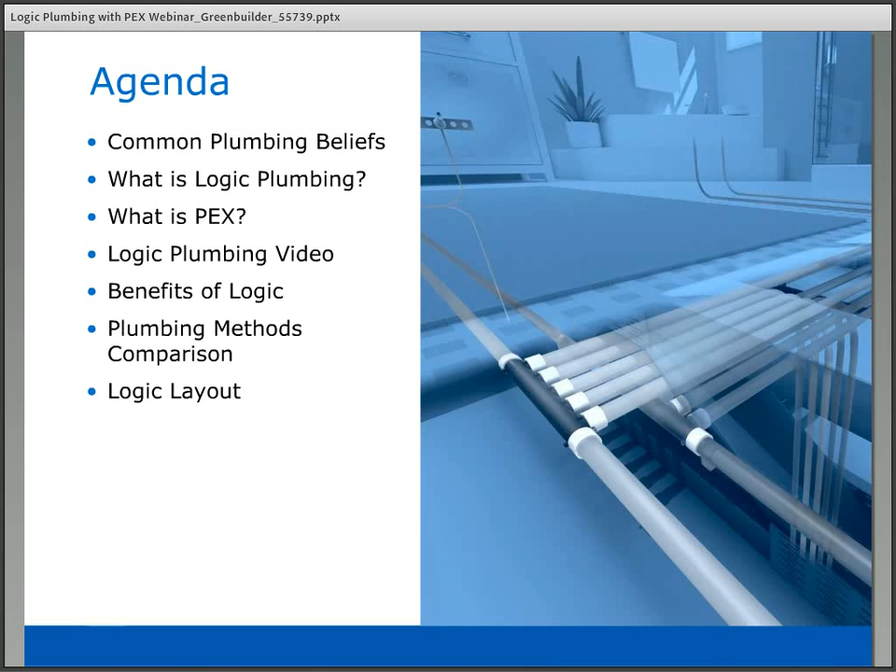Okay, common plumbing beliefs. I apologize.

All plumbing systems are essentially the same, and as long as we can keep all the water inside, that's what everybody's concerned about. The homeowner certainly doesn't care. They just want the fluid to come out of the fixture, and that's it.

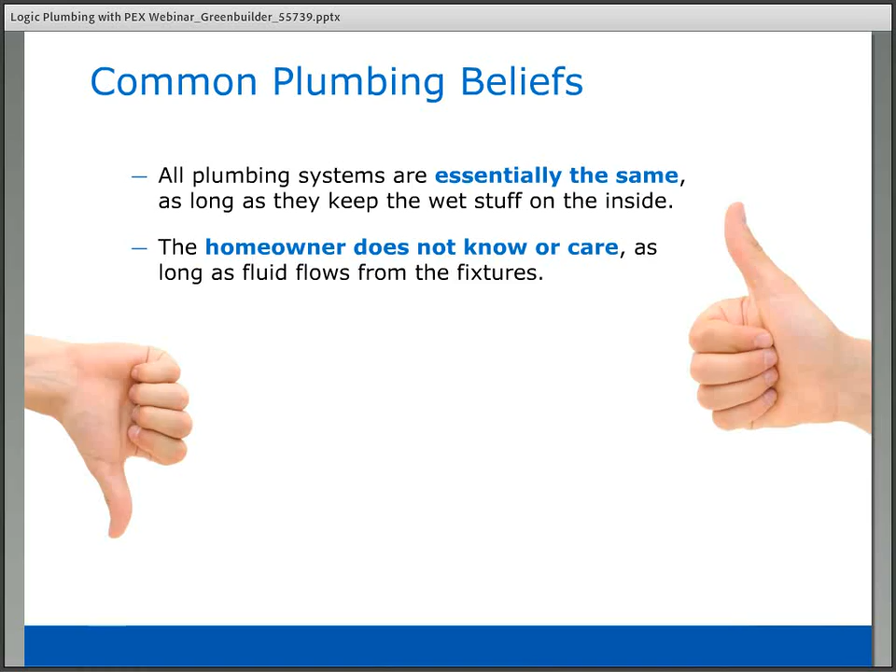I'm having some system issues here because it's jumping around on me.

But traditional rigid plumbing systems have the pitfalls of CPVC and copper pipes. What we see in those typical situations is you're going to have corrosion buildup inside of your copper, those are all the minerals that are coming out of the water and adhering themselves to the copper tubing itself. We can have some freeze damage on your CPVC pipe, and CPVC pipe, you will not know if it's being damaged because its damage occurs from the inside out. So until it actually fractures the outside wall, you will not know if you have an issue or not until it's too late.

Copper, depending on where you live, can create pinholes, that's just because of aggressive water situations. Then you've also got freeze damage that can happen in cold climates on copper, and that's a very brittle burst once it does go.

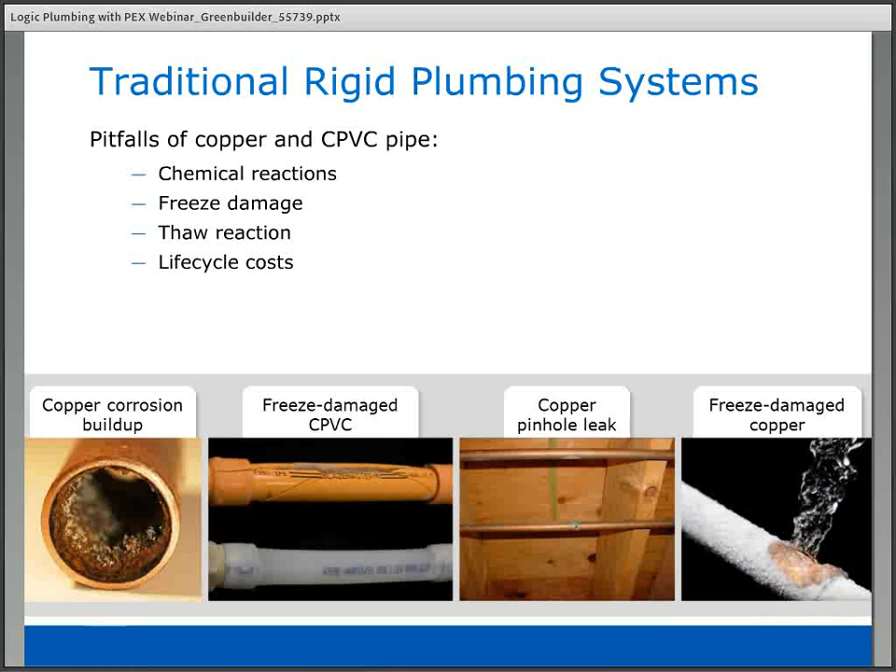So you've got the chemical reactions going on here, as I talked about. There's freeze damages, your thaw reactions can happen, your life cycle costs we're going to be talking about. And basically, homeowners do care about what happens with their plumbing systems.

You've got condensation that's a real issue, especially on the cold water side and in climates where you're going to have high moisture in the air. You're also going to have water hammer as an issue. Water hammer happens when you have a quick closing device such as a valve for a washing machine that shuts off, the sudden break in that water flow will actually cause tremendous amounts of PSI to build up, and that's what you hear when you hear that water hammer. It's actually the plumbing system trying to take in all of that pressure buildup, and it's got to move someplace.

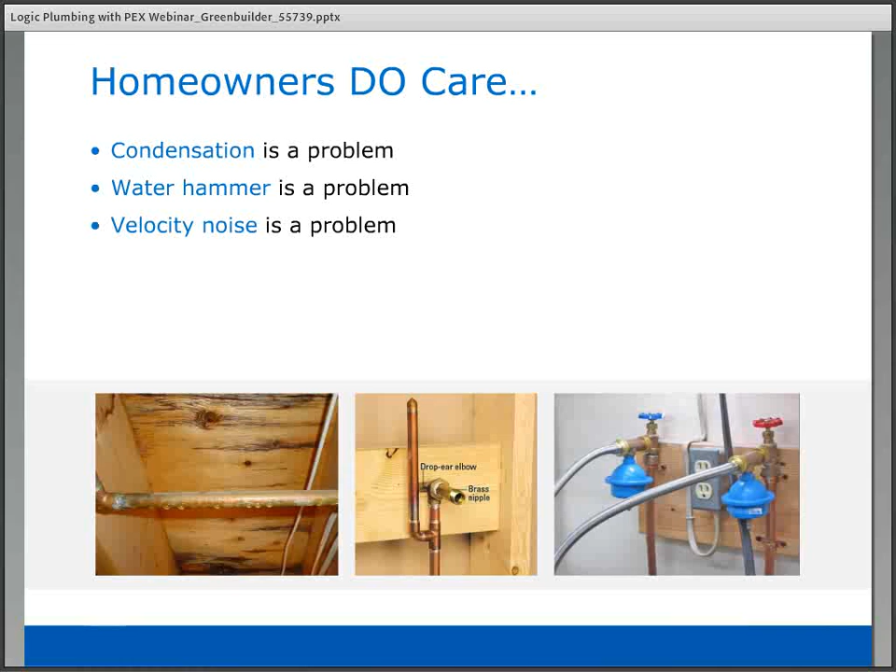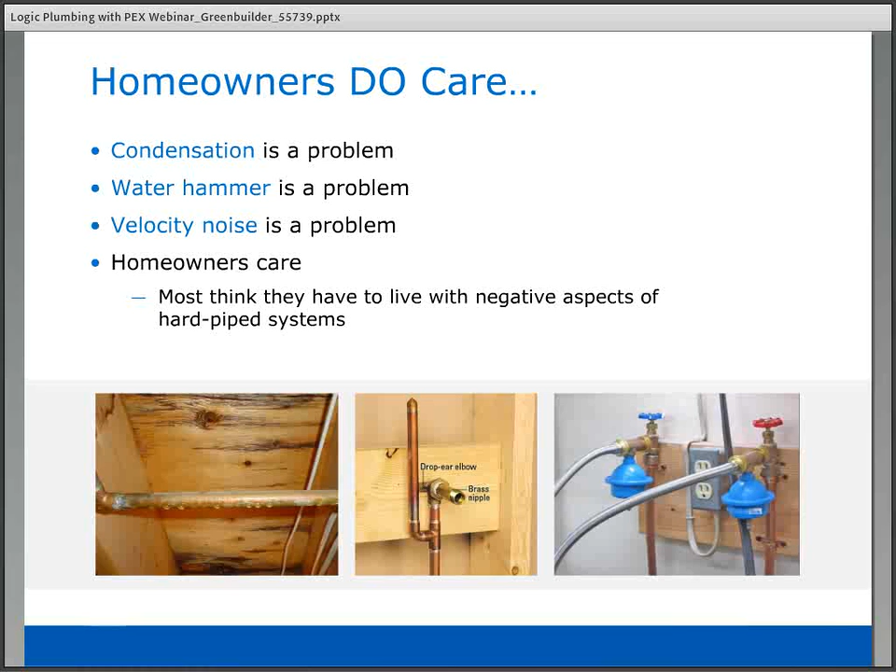Velocity noise, that's the actual sound of the fluid moving through the pipes, is a problem, and homeowners really do care. Most people just think they always have to accept a noisy plumbing system, whether it's the potable water side or the drain water side. Most people just accept this and think that that's the way life is.

Now, what is Logic? The way we describe it at Uponor is it's a nice organized arrangement of all of our multi-port T's, all of our cross-linked polyethylene pipes, our out-of-the-wall systems, which are how you get the PEX itself out of the wall and how you hold it in a firm spot so that you can apply valves and things like that.

And all of our fittings are cold expansion fittings listed to ASTM F1960. It's a larger diameter fitting than your standard insert fitting. We have to actually expand the pipe before we can insert the fitting itself, and then the pipe will shrink down around the fitting.

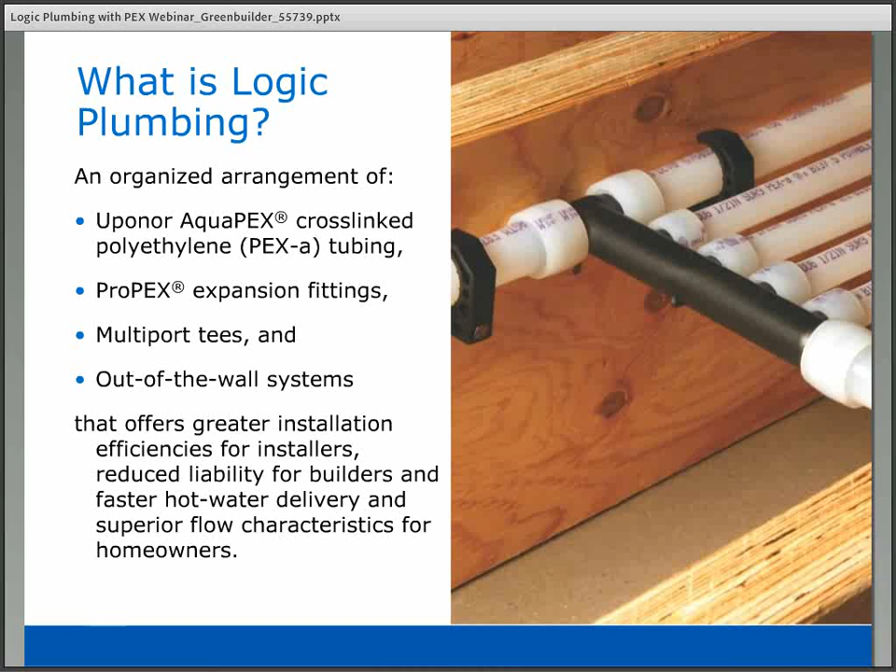By combining all of these, you can pick up some really good efficiencies in your installs. A better, more efficient install means less time on the job, less liability because you're cutting the pipe and not putting in all these connections, so you're going to get better hot water delivery systems as well, and superior flow characteristics compared to any other PEX piping system.

So what is PEX? A lot of people are not familiar with what PEX is, and PEX is an acronym. It stands for polyethylene, which is the PE, and then cross-linked, which is the X.

And what is cross-linking? It's actually where we take the carbon atoms and reconfigure them through an extrusion process and temperature. What that does is take these straight line molecules in a regular high density polyethylene pipe and turn them into something like a chain link fence. We've realigned all those molecules so they can really handle increased pressures and temperatures.

And the temperature ratings on all PEXs are exactly what you see here: 200 degrees at 80 psi, 180 at 100 psi, and 73.4 at 160 psi. It can handle tremendous amounts of pressure. And these are lifetime operating temperatures, not just the maximum temp it can handle.

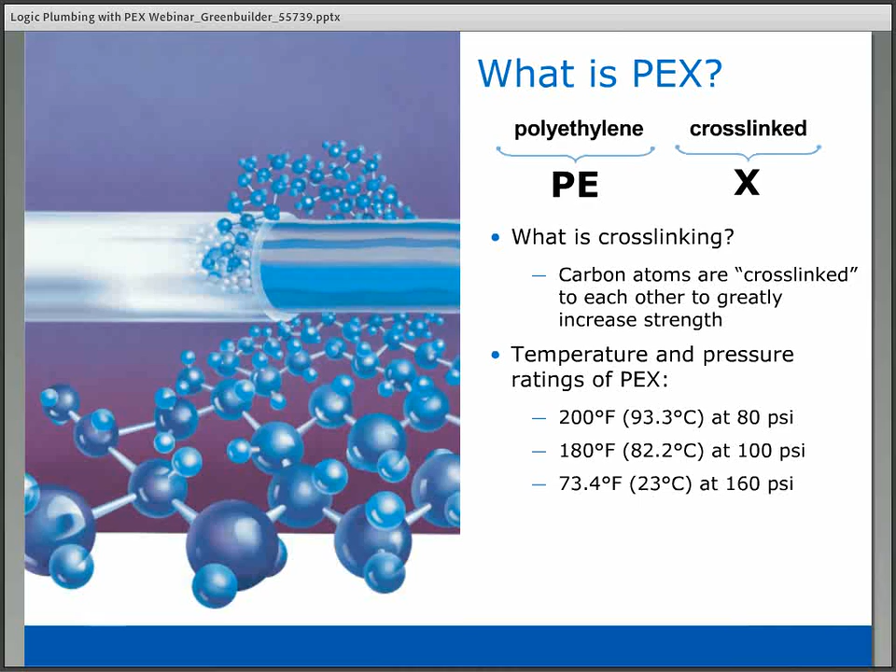So again, there are lots of different PEXs out in the marketplace, and they're not all created the same. The methodology we utilize is the PEX-a method, and its crosslink percent is 80% plus. Your PEX-b is a silane type of PEX with a lower crosslink level, 65 to 70. And then there's PEX-c, which is cross-linked by a radiation method, with 70 to 75%.

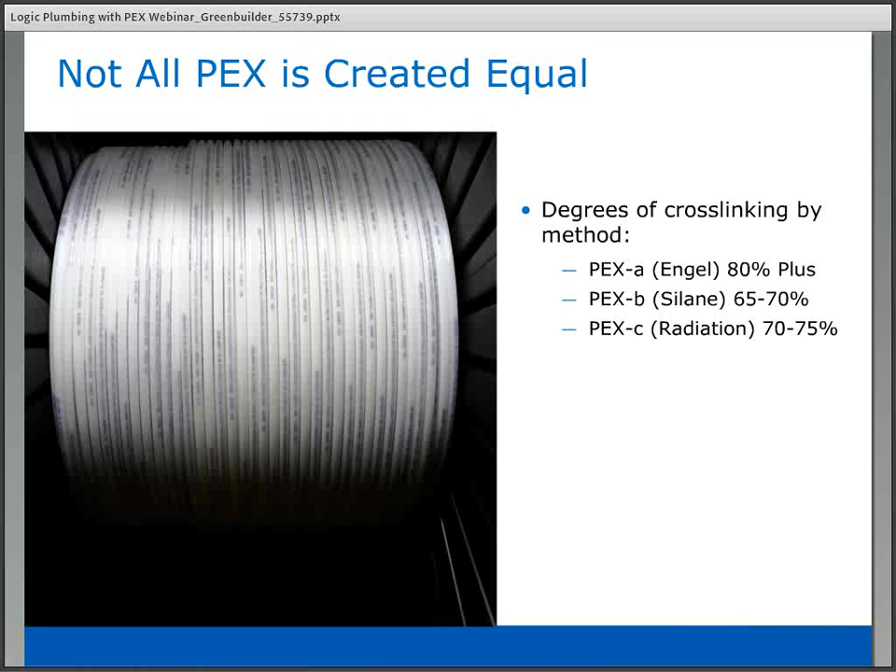And because those methodologies for cross-linking are different, and we're going to go through those, you'll see how the PEX-a method gives you the most superior PEX product in the marketplace.

So what are the benefits of PEX-a versus the others? We cross-link our product above the crystalline melt point, meaning when it comes out of the extruders very clear and very hot, and it's in a tube form, it's already cross-linked. We do not do anything else to it. You have consistent cross-linking all the way through that tube wall.

When you look at PEX-b, what they do is extrude a lot faster than we do. But when it comes off their extruder, it is not a cross-linked product at that time. They have to go through a secondary process to cross-link, putting it in a heat and moisture chamber. That heat and moisture will then activate the silanes to start the cross-linking process. Because they're cross-linking this in tube form, you're going to get that moisture mostly on the outside of the tube and some on the inside, and it doesn't penetrate the tube wall.

Then when you look at PEX-c, the radiation method of cross-linking, it is extruded much like PEX-b is. It has some compounds inside the tube wall. They extrude it very quickly, put it on a large reel, then send that tubing through a radiation tunnel. That tunnel is hitting the radiation on the outside of the tubing only, so you're going to have your cross-linking mostly on the outside of the tubing and not nearly as much on the inside.

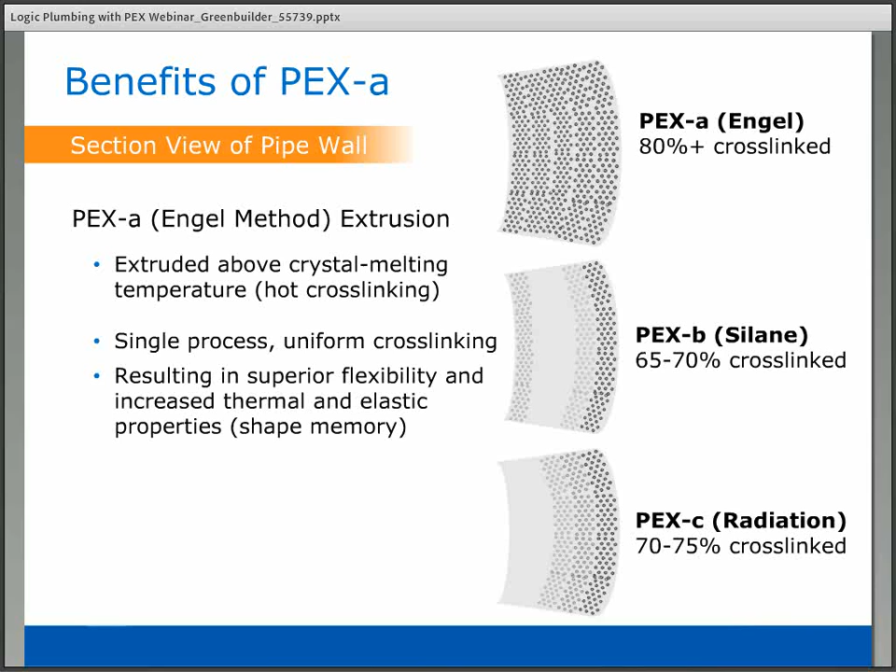So by having consistent cross-linking across its entire tube wall like Uponor does, it results in extreme flexibility, increased thermal and elastic properties, which is the shape memory that we're going to talk about and how you make our connection.

More benefits: the ability to mechanically expand our pipe versus PEX-b or PEX-c. That allows us to insert a larger diameter expansion fitting, and then the pipe will shrink down around that fitting. We have greater flow characteristics than competitors with a copper crimp system or a stainless steel crimp system.

The cross-linking process we utilize allows us to also heat kink repair the product. You can actually take our tubing, kink it about a dozen times, and you will not have a broken pipe. Take a heat gun, keep it about 3 or 4 inches away from the pipe, rotate it around the pipe, and it will turn clear, as you see in this picture. At that point, it has gone back to its memory size that it cross-linked at, so that spot will not be a weak point in the pipe. As a matter of fact, you've re-stimulated the cross-linking process a little bit there, and that portion will be even stronger than the rest of the pipe.

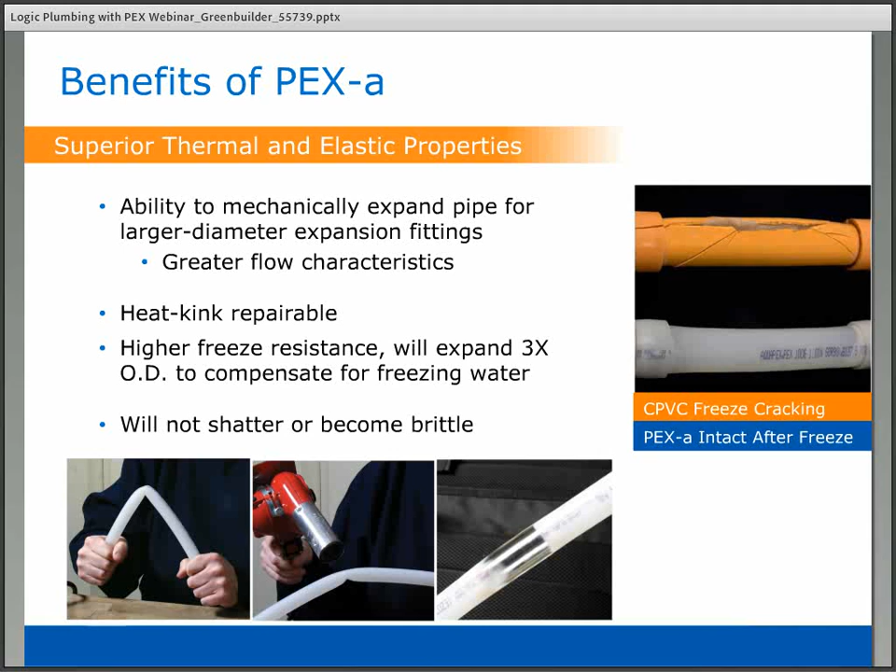We also have higher freeze resistance. Nothing is freeze-proof, it is freeze-resistant. Our pipe will expand if you get an ice dam, about 3 times its OD, and it doesn't shatter or become brittle. Actually, the colder our pipe gets, the stronger it gets. Again, when you compare it to CPVC, you will not know you have an issue with CPVC until it's too late, and it's already through the entire tube wall because it fractures from the inside out.

Okay, some more benefits of PEX-a. Again, we have that 80% plus cross-linking. We have a tight bend radius, 6 times the OD, so you can do about a 3.75 inch bend radius. That affords you the ability to go around corners without putting elbows in. Again, Uponor's message is, do not cut the pipe. Don't put a fitting in it if you don't need one.

So then with PEX-a, when we cross-link it, we cool it in a straight form before it goes onto a large reel and goes to the recoil operations. So it's always going to want to go back to that straight pipe through that thermal memory.

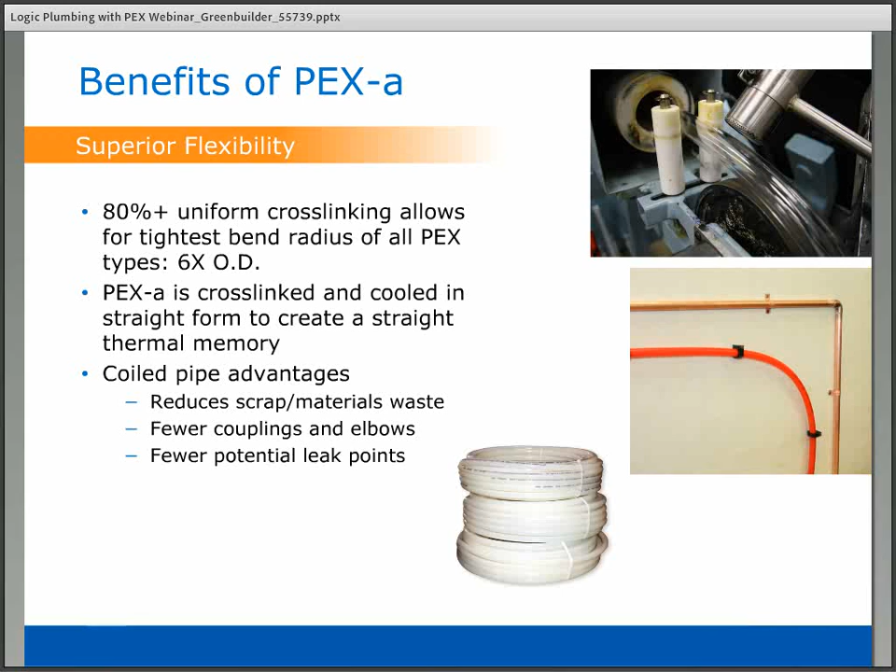The coiled pipe gives us a lot of good advantages. It's going to reduce scrap material waste, fewer couplings and elbows, things like that. And once you do not cut the pipe and you go around corners without making connections, you get fewer leak potential points. Again, managing your liability.

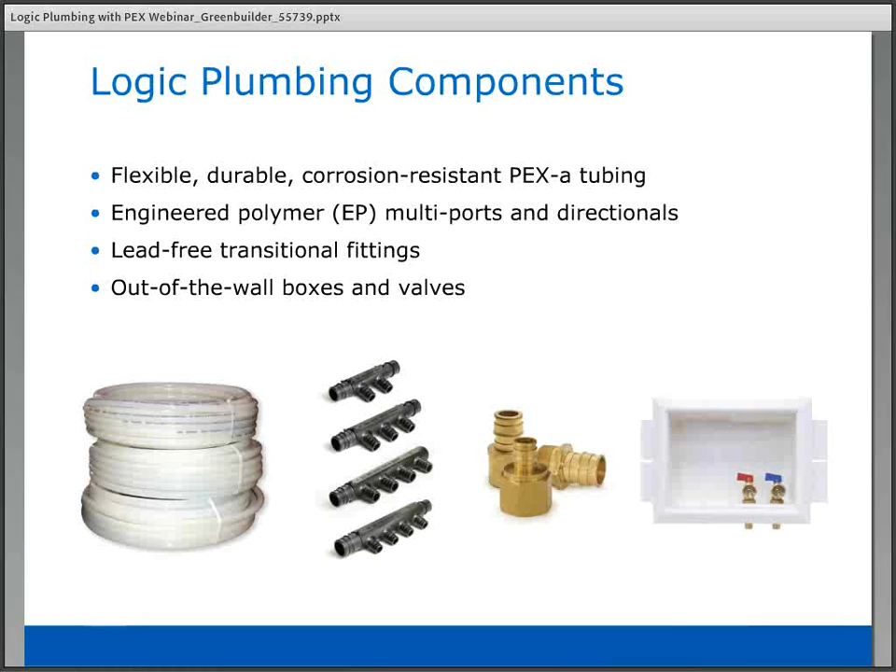The components in our logic system we talked about earlier: we've got the flexible corrosion-resistant PEX tubing, our engineered polymer EP multiports and directionals, a full line of lead-free transition fittings. We are completely outfitted for the January 4th, 2014 national lead law taking effect next year. And then we have out-of-the-wall boxes, so you can do a complete system from inlet to outlet.

We're going to watch a logic video here.

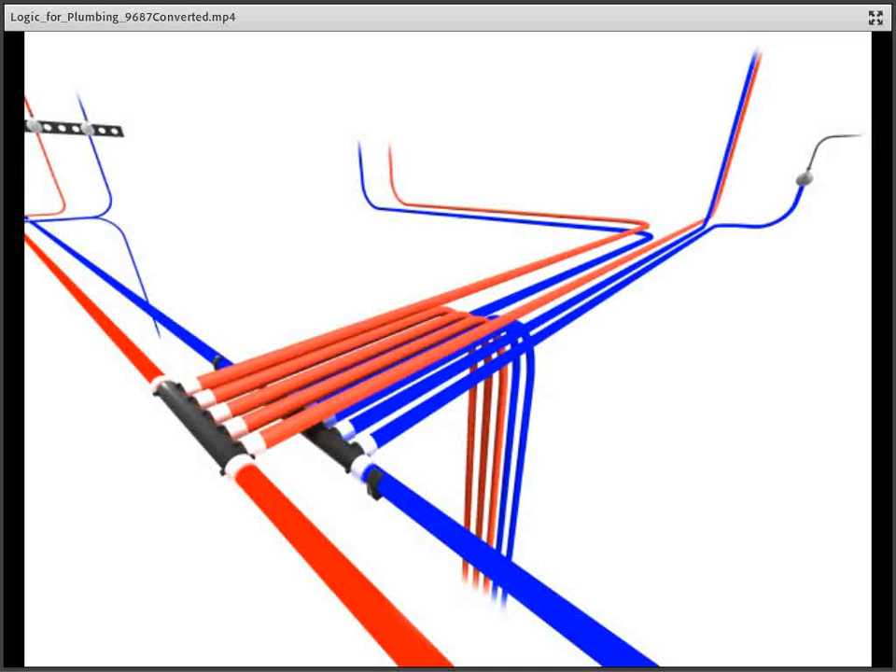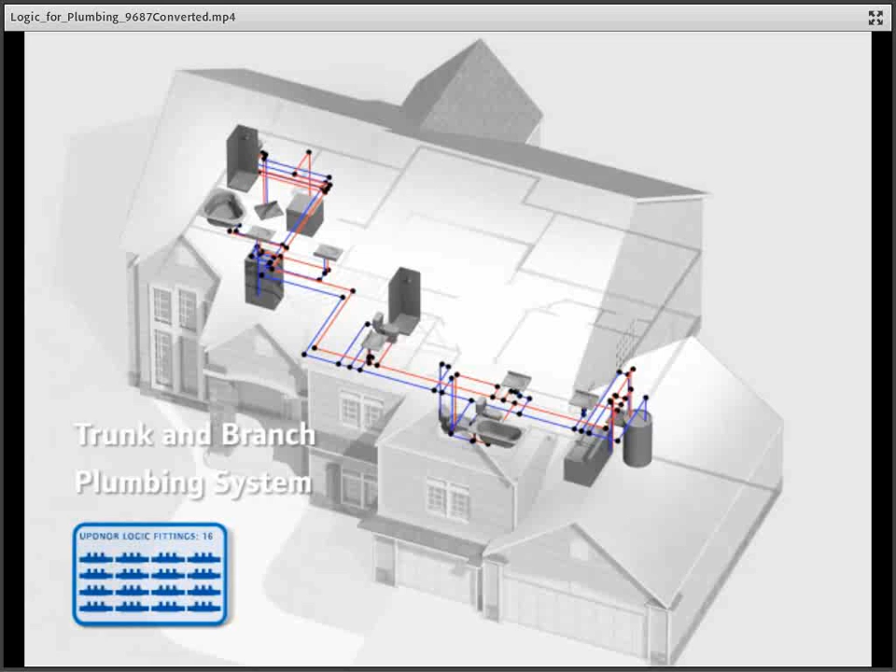With its unique arrangement of flexible tubing and inline components, Uponor Logic is an infinitely flexible plumbing system that will change how you design and install residential plumbing systems. The Uponor plumbing system offers a complete range of plumbing components, including Aquapex tubing, multi-port tees, ProPEX fittings, and out-of-the-wall systems. These provide flexible solutions that take significantly less time to install and fewer materials than traditional plumbing techniques. This typical home example only requires 16 fittings for a total of 59 secure plumbing connections, with no dry fitting or risk of incomplete connections. Compared to a typical trunk and branch home, that's 1/6 the number of fittings and nearly 1/3 the number of connections. Compared to a typical home run plumbed house, Uponor systems use 1/3 the linear run of pipe.

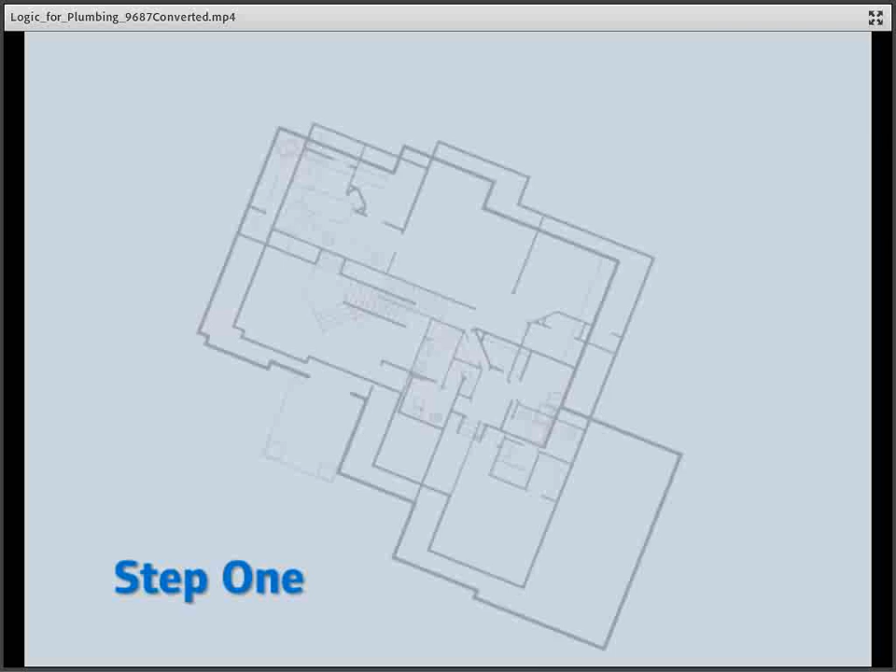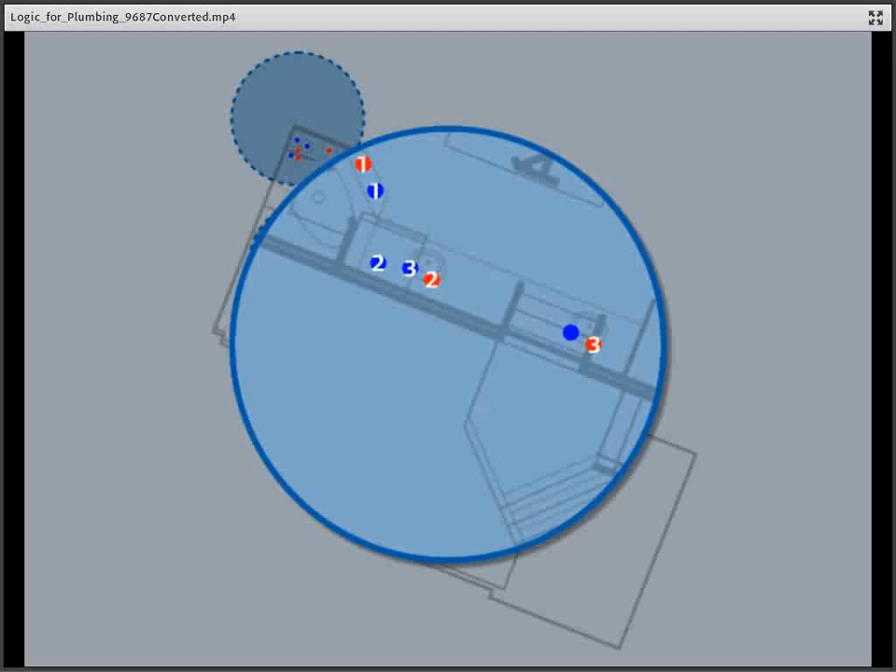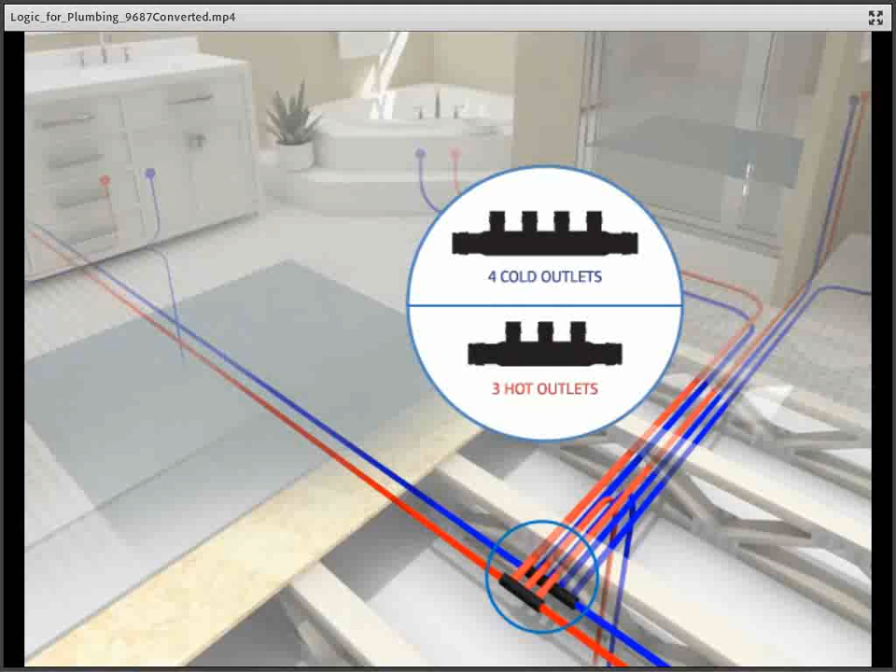To begin using the Uponor Logic system, simply follow our 3-step planning process. Using your building plans, identify the location of all plumbing outlets and hot and cold water fixtures. Mark all fixture groupings that fall within an approximate 10-foot radius of one another on each floor, as they can use a common hot or cold supply line. Chart the most direct supply line path through the floor plan to connect all your fixture groupings. Finally, select the proper location for the multi-port T for each fixture grouping. Maximizing your multi-port Ts reduces fitting needs as well as the fixture connections.

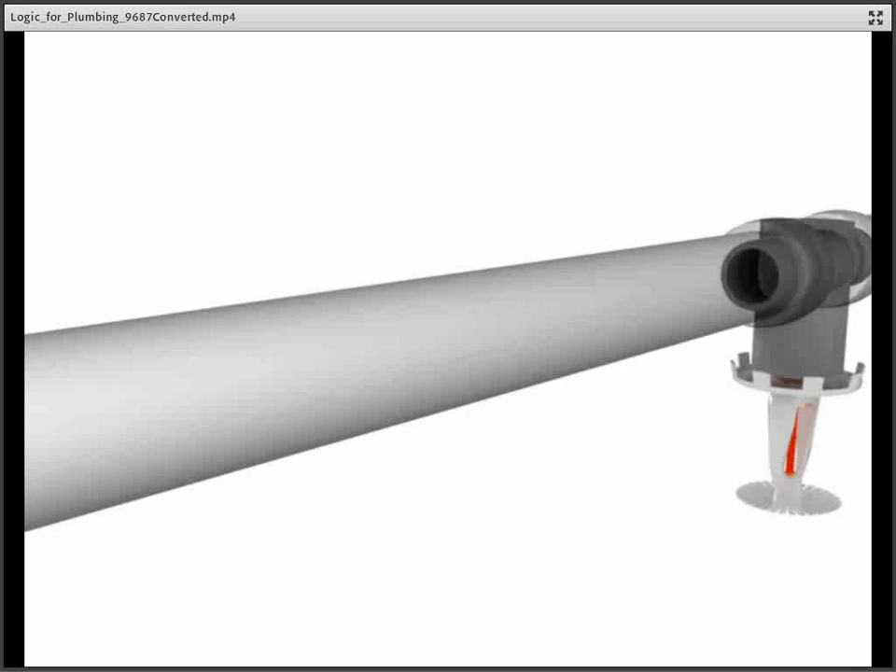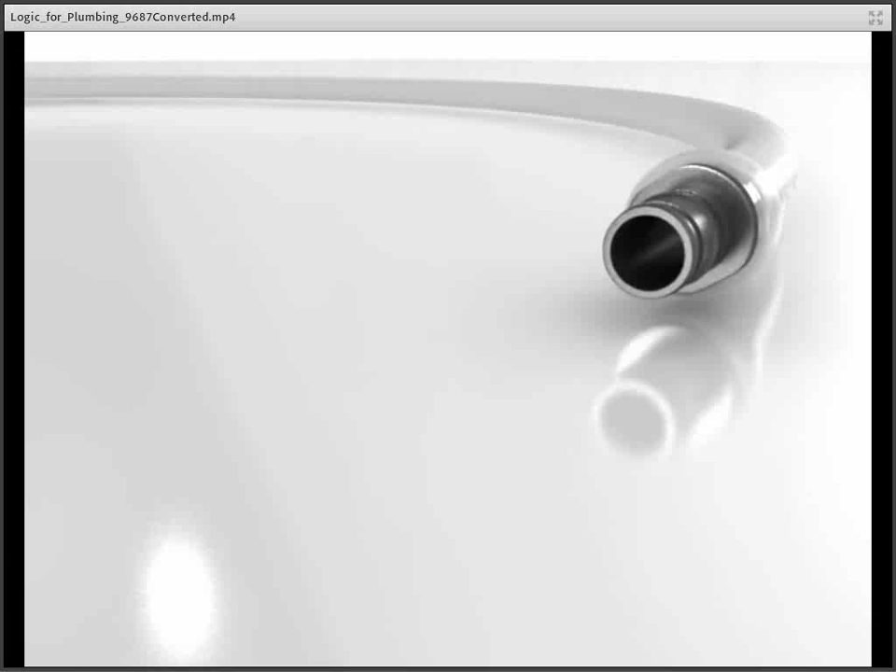Based on our 2 core components of Uponor AquaPEX tubing and ProPEX technology, Uponor Logic provides a complete system for any residential or commercial application. With over 15 billion feet installed to date, we have flexible solutions for every plumbing installation. Smart, efficient, durable. Uponor Logic at work.

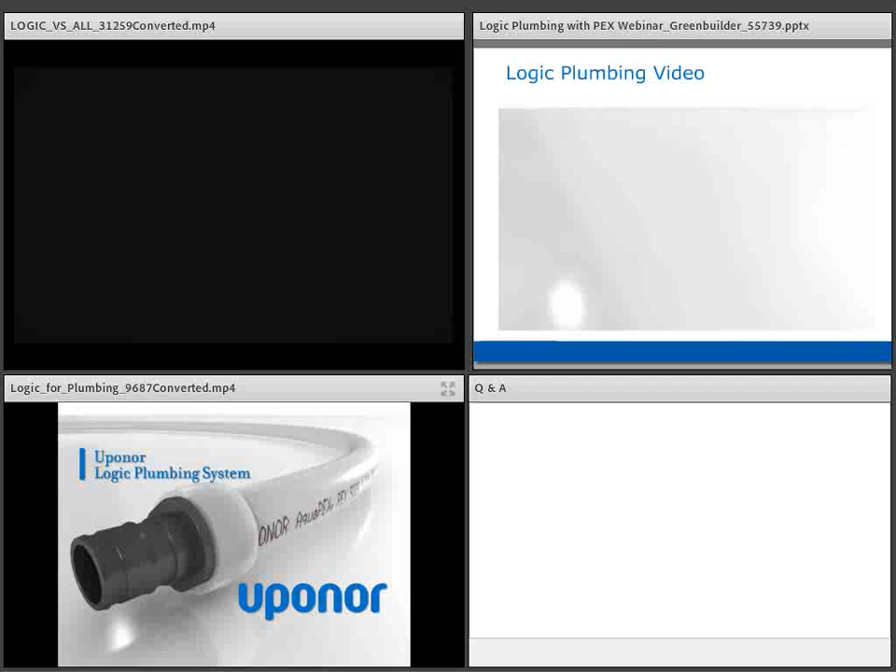All right, I like that video a lot. It really sets the example of how we train people in the field too. We really want them to step back and think about what they're doing, because plumbing so many times can just be so automatic. You really need to be able to sit back and re-examine exactly how you do things, because we're going to approach you and challenge you to think out of the box. And there is a better way. We just have to get that message across.

So, more logic benefits. Again, we kind of touched on this already. Fewer connections. Our multiports are a really nice item that affords us the ability to take this message and really believe in it, because here's a great example where if you're going to plumb a house with trunk and branch, if you did not use one of our multiports, you would use all of those T's. You would have 18 connections, and if you tried to duplicate that, it would be 22 inches long. So again, Uponor is all about do not cut that pipe if you don't have to. We have so many different multiport options available that we'll be very surprised if we're challenged with something that we may or may not have.

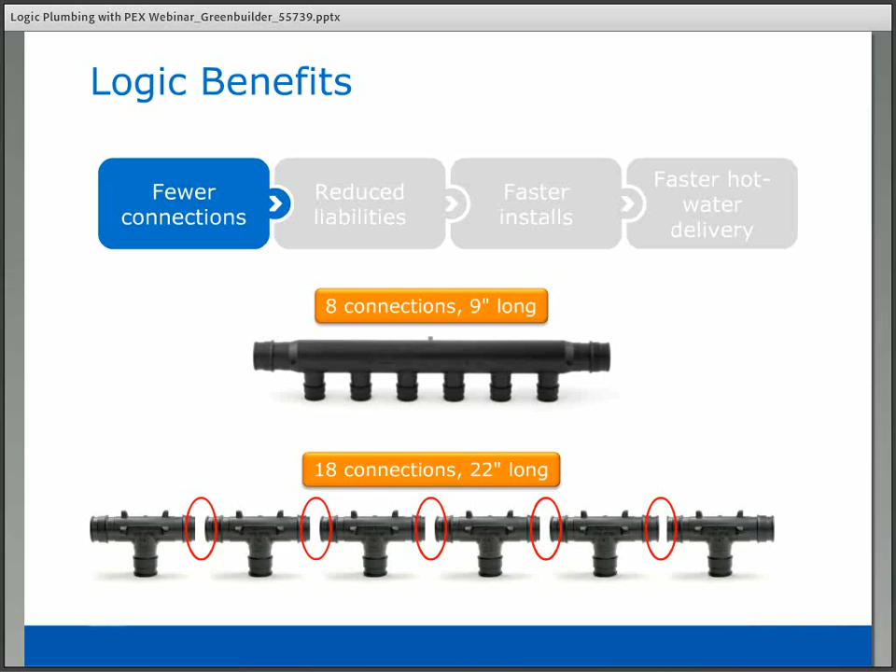So when we also talk about not cutting the pipe, when we talk about less liabilities, reduced liabilities, we're talking about, again, thinking out of the box. How can I plumb this without putting a connection here? There is a way to do it. So with ours, fewer connections is always going to mean fewer leak points.

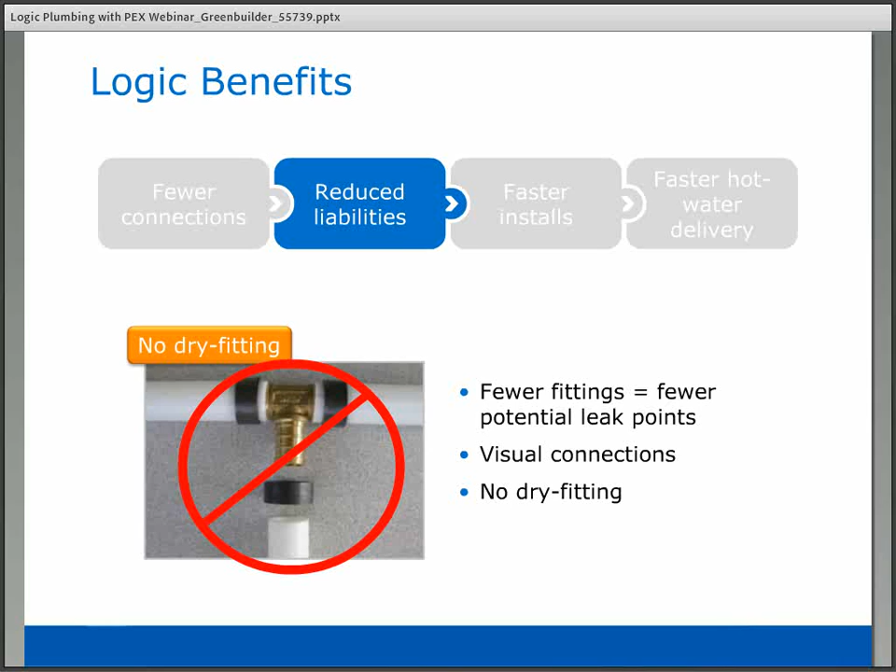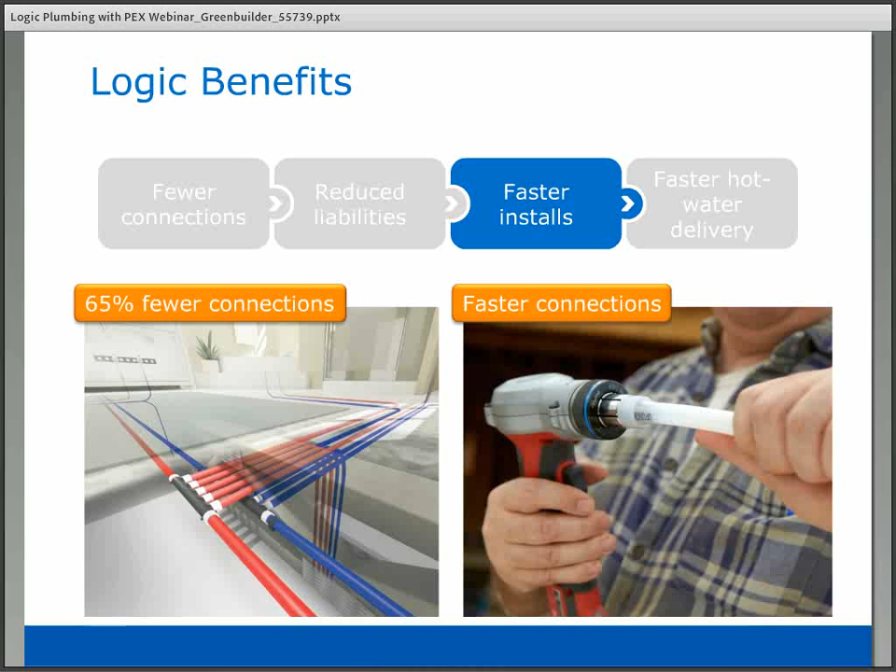We're also not going to use any glues. We're not going to be gluing anything together. With CPVC and glues, there are so many factors that can be involved in using that type of system. What's the temperature outside? How long do you have to let it dry before you can put pressure on it? That's like 24 hours at a minimum. Now throw some humidity in there and you may be talking a couple of days. Did they get enough glue in there or did they not get enough glue in there?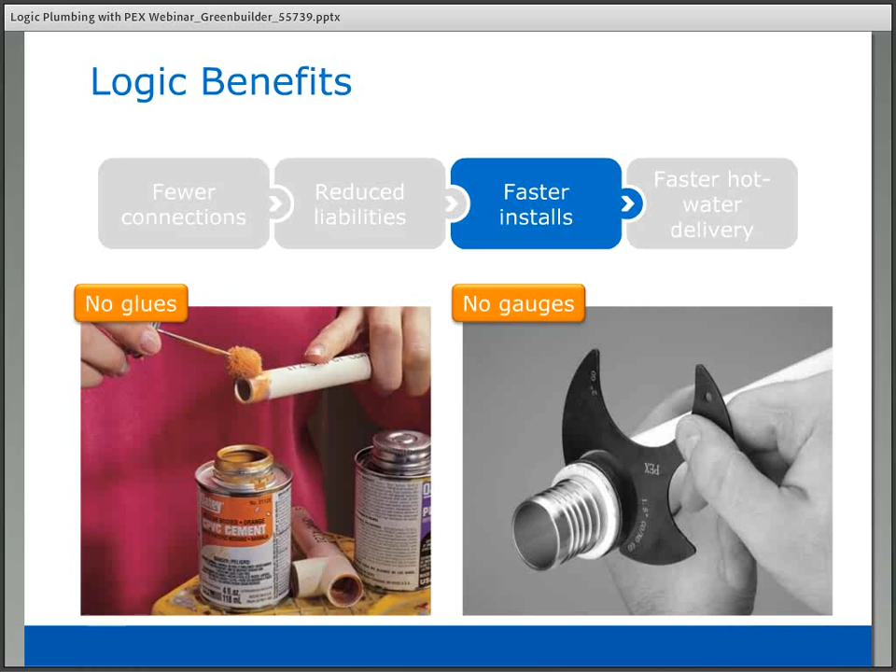Then when you're talking about the insert side, you don't have to use any gauges. I would challenge contractors, if they're using copper crimps, show me your gauges, your go-no-go gauges. Do you know where they are? Do you use them on every connection?

You're also going to have, with faster installs, I've got another video that we're going to watch here. And what you're going to see is we're going to plumb with logic. We're going to do a crimp system, we're going to do the CPVC, and we're going to do the copper. As you can see, the contractors we had come in to do these on the crimp and the CPVC, we had one dry fit each.

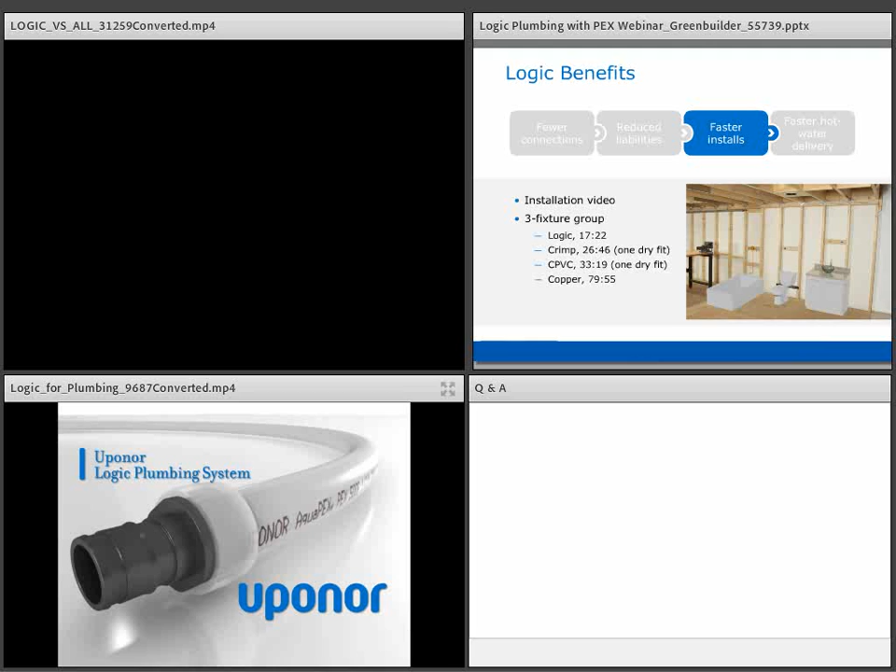Another benefit of the logic is you can have faster hot water delivery. What we do is, much like they did in that video, take the shortest route possible, keep those drops to a minimum length, and things should go along very nicely for you. That gives you shorter consecutive use time versus trunk and branch or home run.

We also have what we call a D'MAND hot water delivery system. It is a user-activated pump, so you get the benefits of having a recirc system without it running all the time or being on a timer, because you activate it either through a motion sensor or a push button. You can have water to the tap in seconds, and you can save up to 40 gallons per day in a typical house.

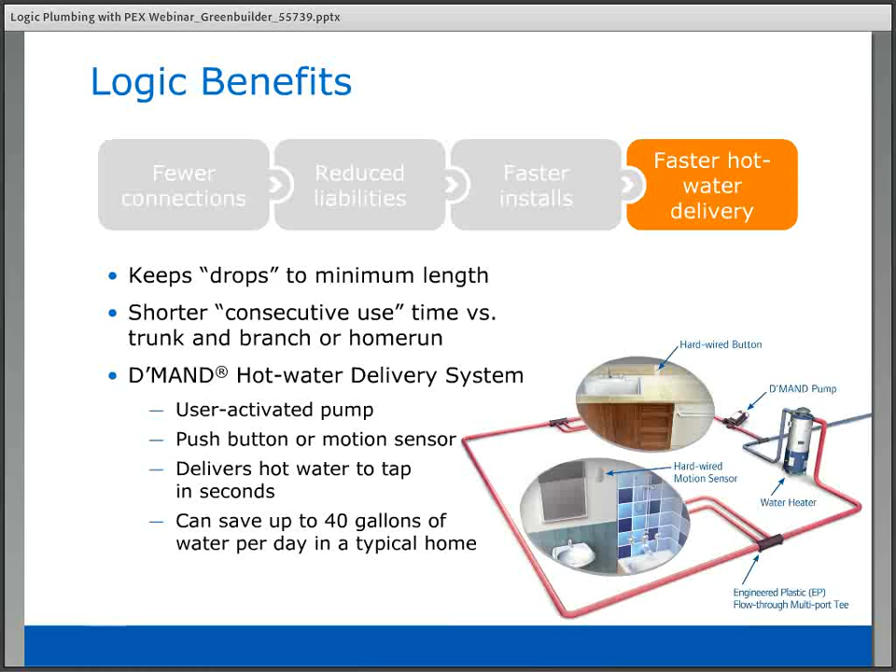Again, here's a chart showing that faster hot water delivery system. We're talking about second consecutive use time here. It's 30% faster than the trunk and branch, and 50% faster than the home run.

Some of the numbers that are out, when you compare ounces of water per foot of tubing, comparing type L copper to PEX, we have 24% less water in the line that you have to dump and drain. That's on a half-inch pipe. Compared to CPVC, it's 6% less. As you get up in sizes, it only gets greater and greater. For instance, type L copper against 1-inch PEX is 29% less, and on CPVC we have 12% less.

So not only are you going to get the water there faster, you're also going to waste less water as well.

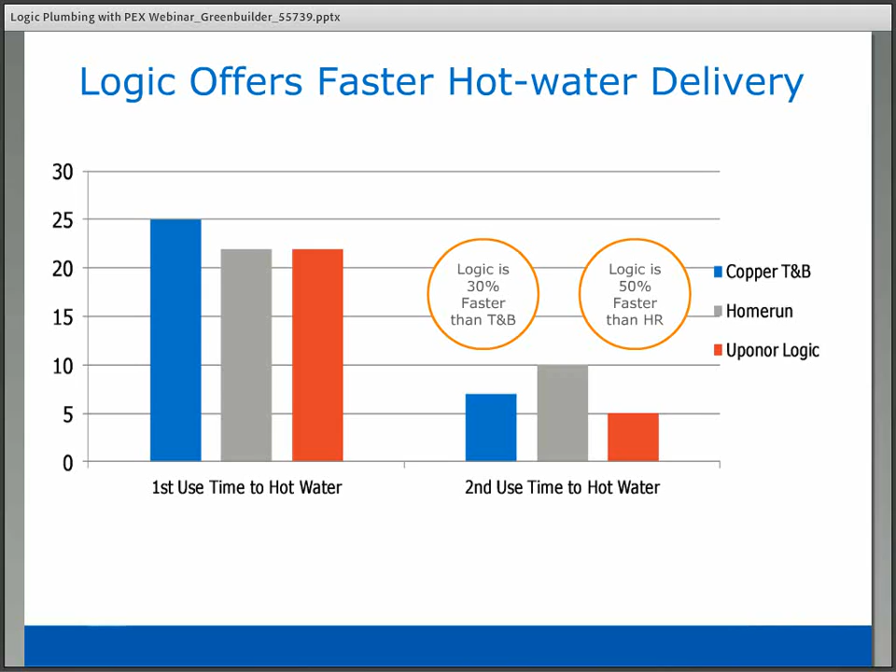Some logic plumbing examples. We're going to talk about rough-in plumbing only, and we're going to show you 3 different types of systems here: a slab-on-grade single-story house, a 2-story house, and a very large bungalow.

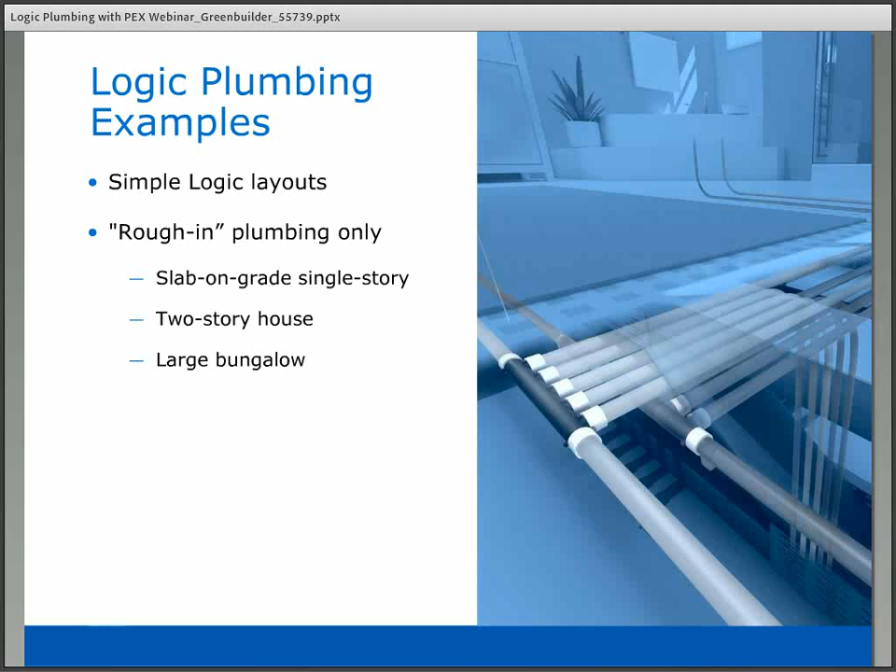We're going to step through this just like the video said, logically looking at the zones and how much plumbing is required. We'll look at this section here, and we've got 3 cold and 2 hot. We'll look at this little section, and we'll have 4 cold and 3 hot. Then we'll look at this, and we come up with 2 cold and 2 hot.

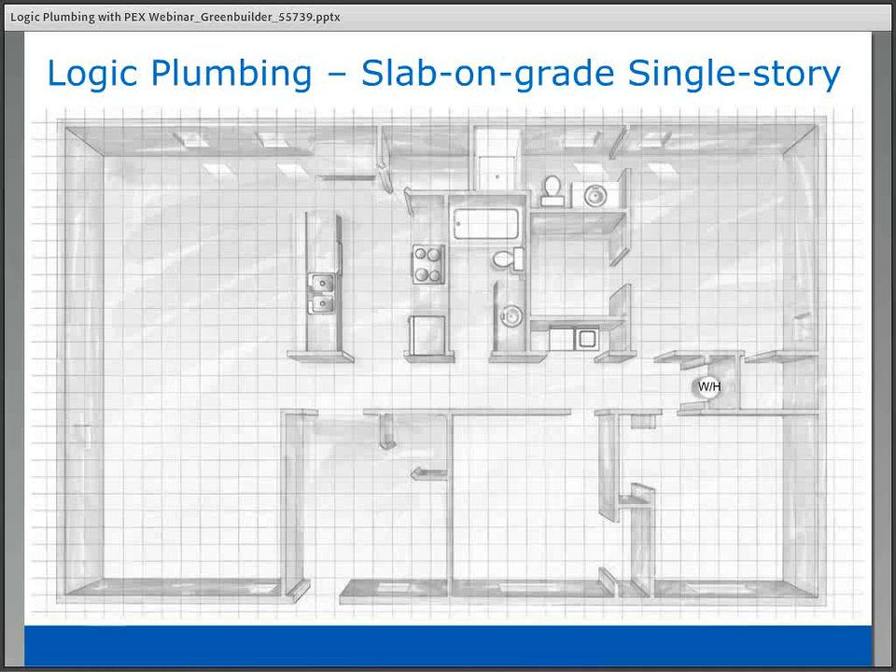So we start at the water heater. We're going to have these parts to hook up the water heater, and then we'll take off with the pipe and go to this first section here. We'll use a 2-port and a 3-port multi-port. We're going to pass through on this because we still have these other zones on the left to be able to plumb.

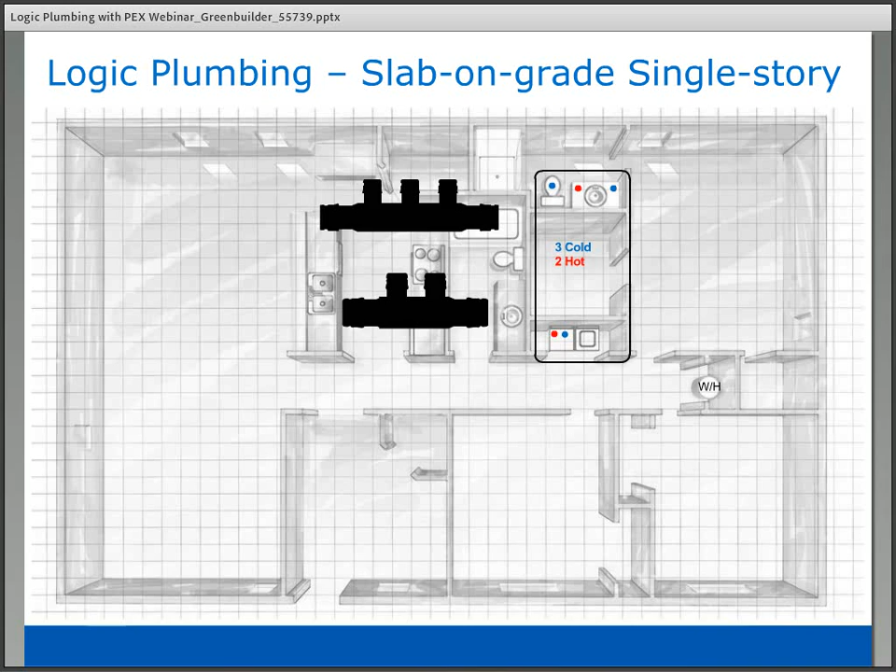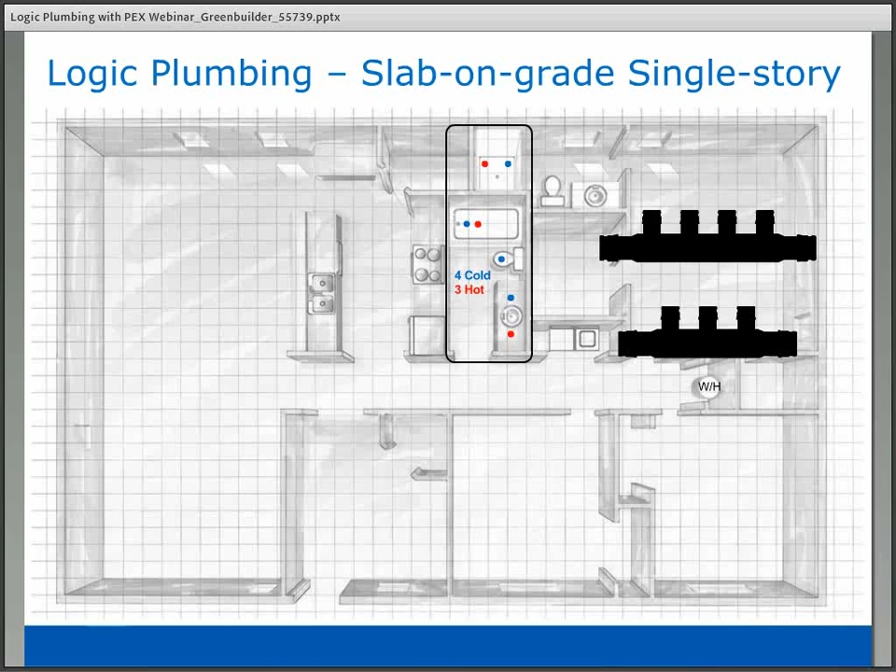When we look at the next zone, where it had the 4 cold and 3 hot, again we're going to use a 4-port and a 3-port multi-port. We want to do that so that we can still pass through to the last part of the plumbing system in this house.

And here, because it's only 2 cold and 2 hot, we're able to use a couple of T's, because that's the end of the plumbing system right there.

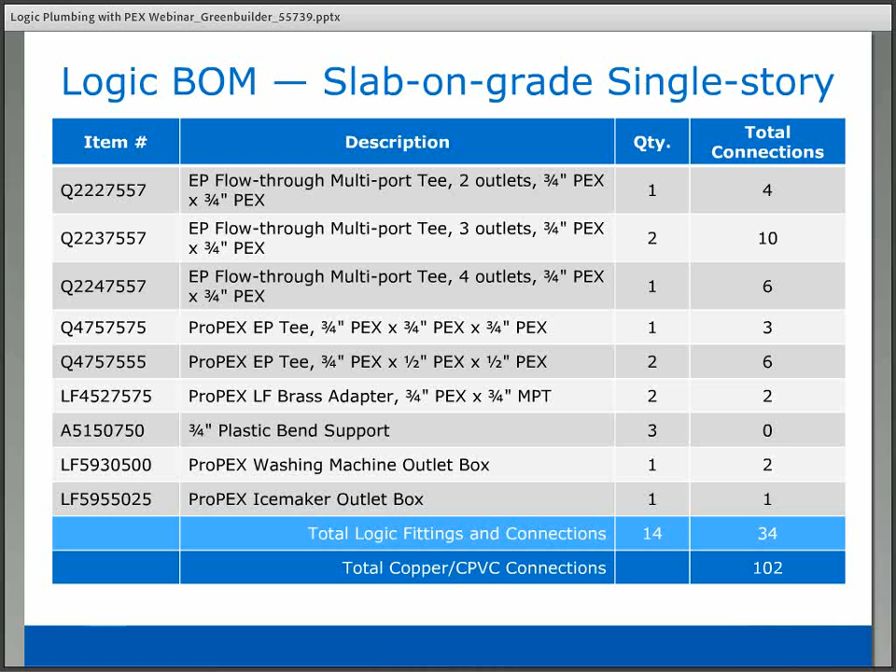The next one, we're going to look at a 2-story house. We're going to go through this with the exact same logic as we did with the last one, just like they did on the video.

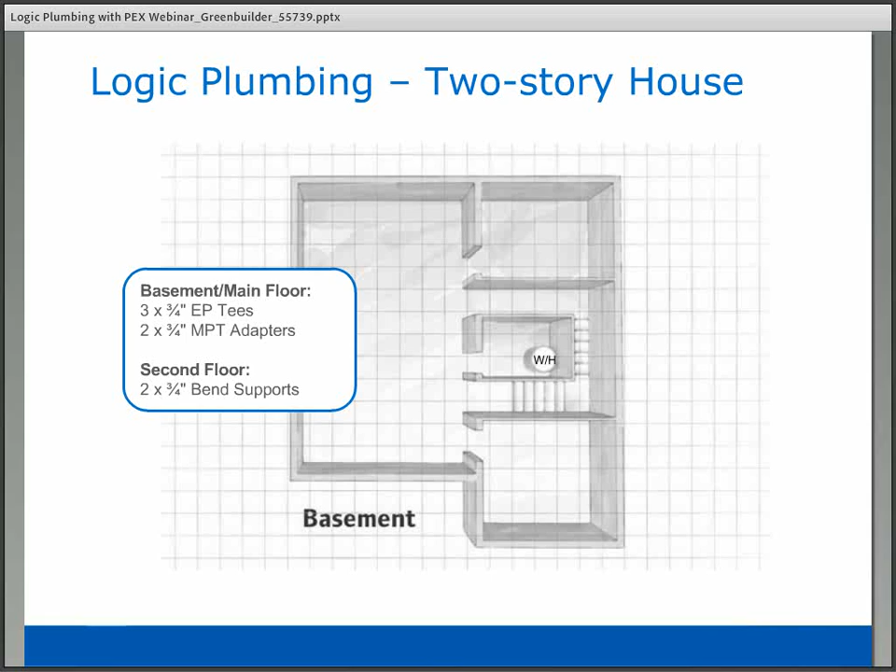In the basement area, we would have these things to start the plumbing system right here. Next, we're going to go to the main floor, and we're going to have the half bath. We're going to use a T and a 2-port multi-port because we're still going to pass through and plumb some other areas of this house, since we've got 2 cold and 1 hot there.

And those are the T's we're going to use to do this portion. Now that part of this house doing Logic is completely plumbed.

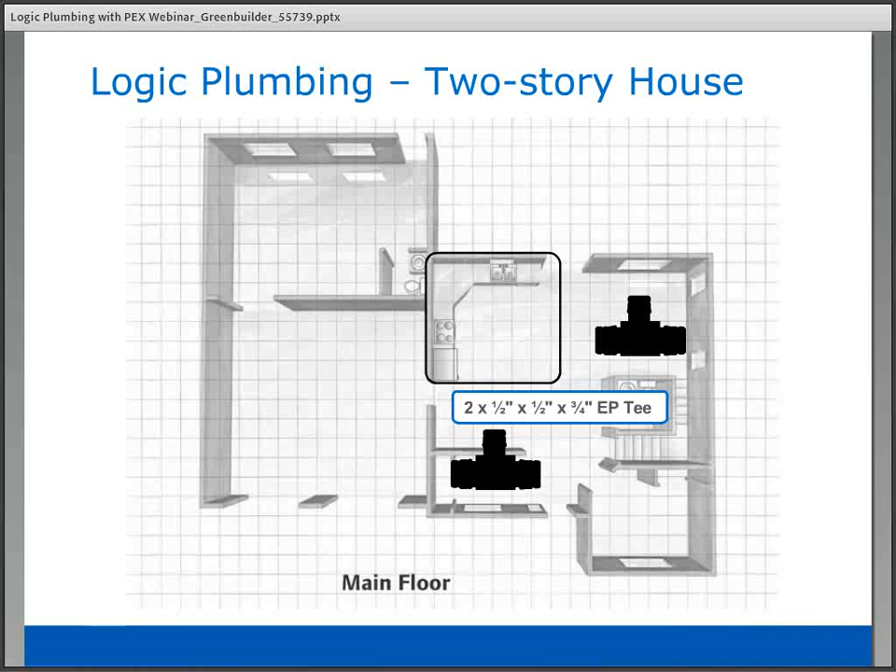Now we're going to take off up to the upstairs, where we'll do the first bathroom area. We're going to have 3 cold and 2 hot there, so we'll use a 2-port and a 3-port pass-through multi-port, because we still have other areas upstairs that have to be plumbed.

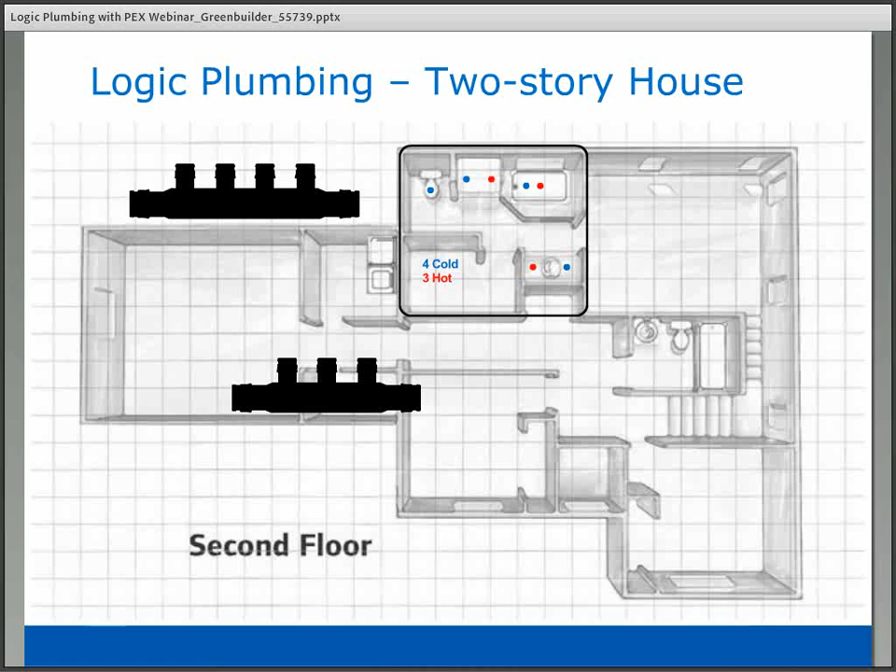The next area we're going to plumb is the big master bath. There we're going to have 4 cold and 3 hot. And because we still have some portions to the left of this that have to be plumbed, we're still going to use a 3-port and a 4-port multi-port pass-through.

Then when we get to the end here, we're going to use a branch style multi-port. It's not a pass-through anymore because we're at the end of the plumbing system now. So as you can see, we're going to hit these two spots right here, and we'll plumb from the bottom and from the top.

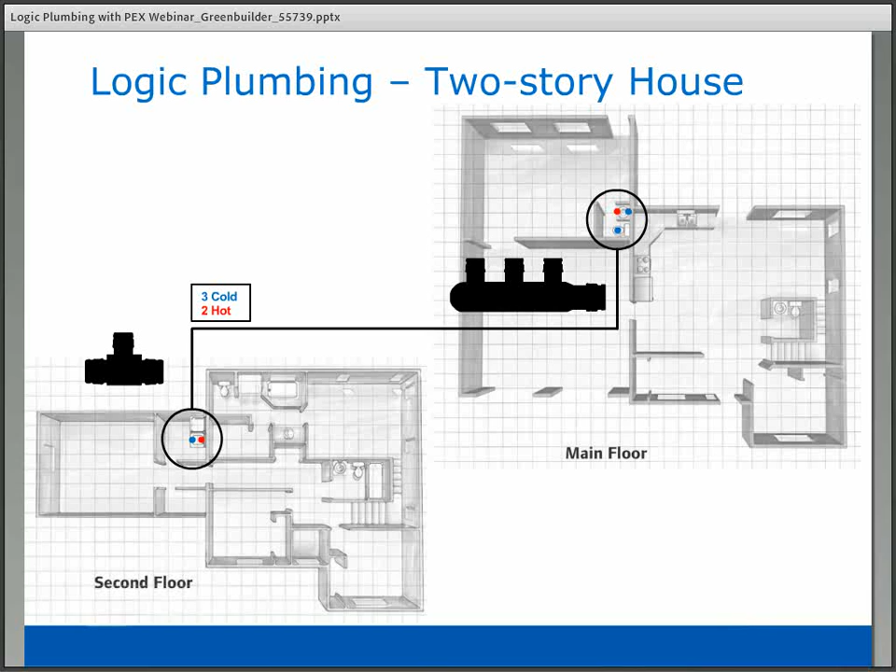And we've got 3 cold and 2 hot, so we're able to use a T and the 3-port multi-port.

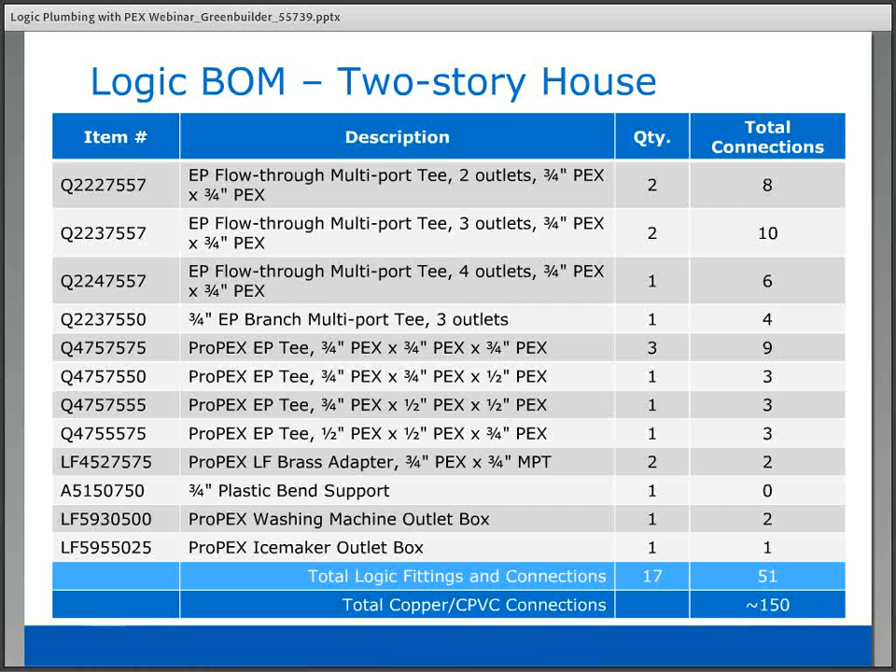And that's what this bill of materials would look like. When we go to the bottom line, we're talking about 17 fittings, 51 connections, versus somewhere over around 150 connections if you used CPVC or copper.

And now the large bungalow. This will be the last bill of materials we'll look at for this moment.

Again, we're going to start in the basement, going to look at the main floor. We're going to do this zone here. It's going to have 4 cold, 4 hot, so we're going to use 4-port pass-throughs here.

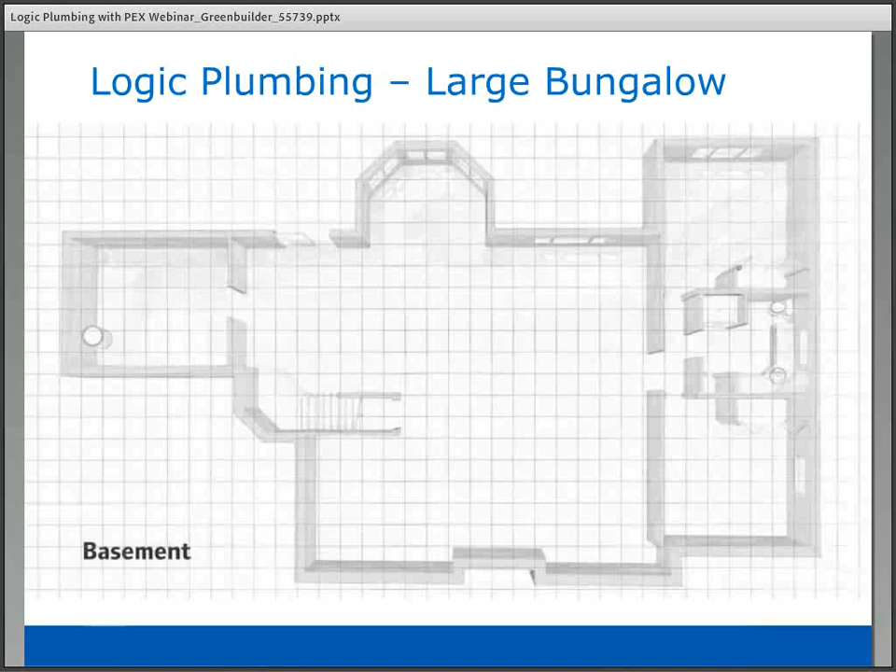We're going to look at the next zone. We're going to be using a 3 and a 2 because we've got 3 cold and 2 hot. We're going to pass through to the next area, and again we're using a 3 and a 2 because we've got 3 cold, 2 hot.

We're also going to be putting 2 bend supports in here. And again, we're not going to cut the pipe or put a 3/4 elbow in there. You don't have to, because now we're going to go up to the next level again.

We're going to catch the master bath here. Now that's the end of the plumbing system, so we can use branch multi-ports at that point. We're going to use a 4 and a 3 because that's the requirement there: 4 cold, 3 hot.

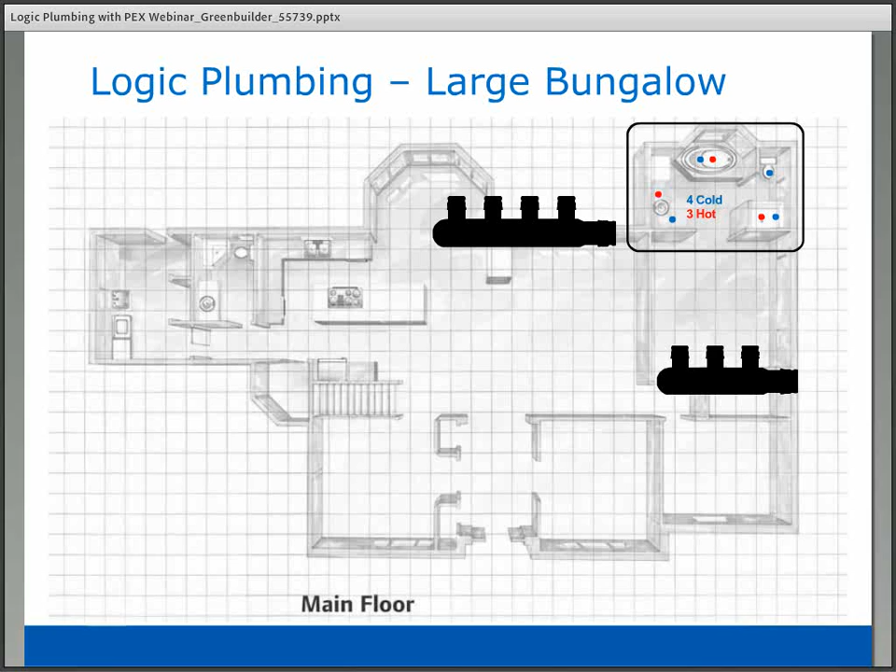And again, this is what that bill of materials would look like. We're going to have 18 fittings with about 47 connections, versus the approximate 130 connections on the others.

So, does anybody have any questions so far?

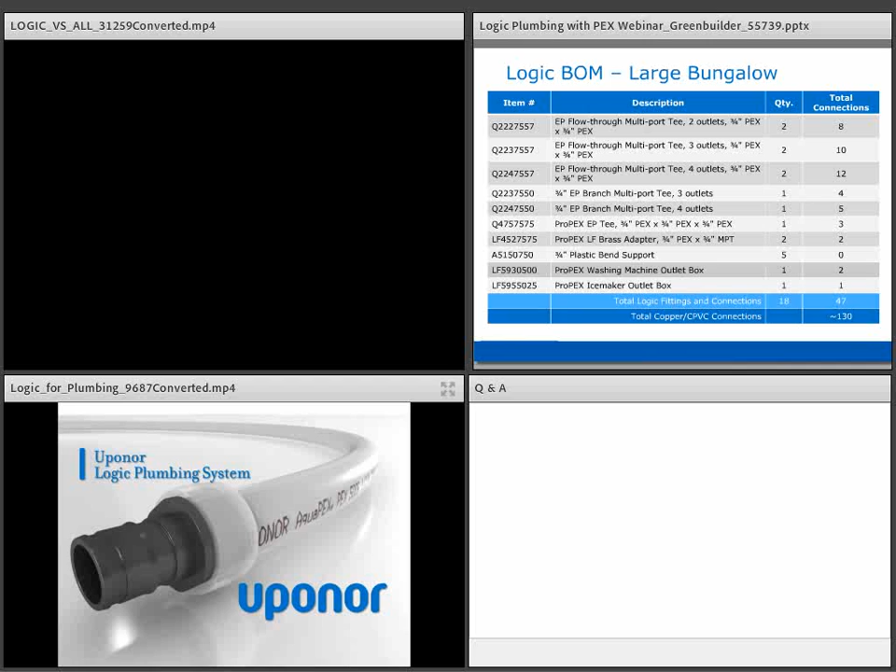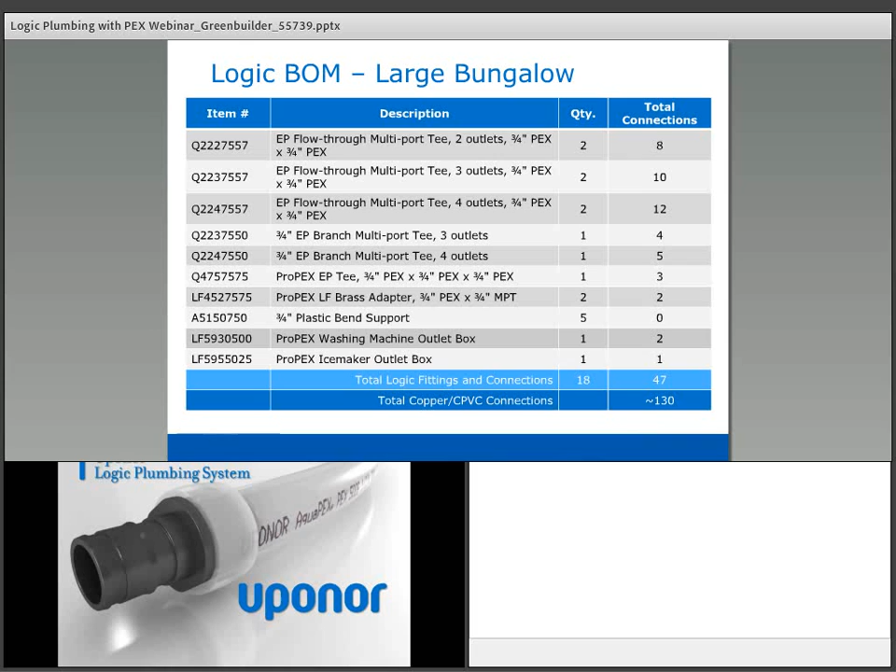All right. I'm not seeing it at the moment, Tim, but I would say that as you kind of reach towards the conclusion here, we'll get to those Q&A right at the end there. Okay.

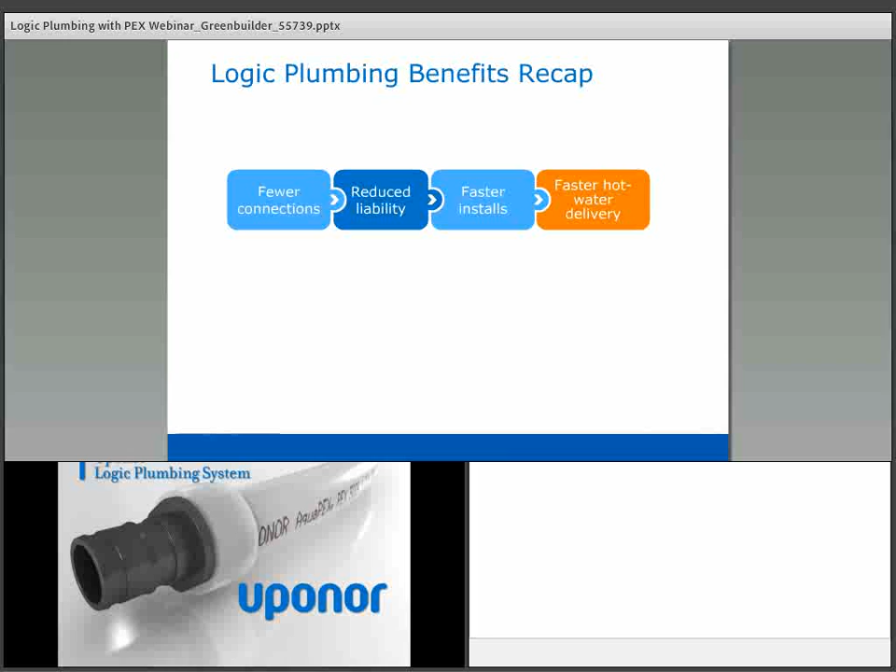All righty then, we will travel on. Okay, so let's do a recap here.

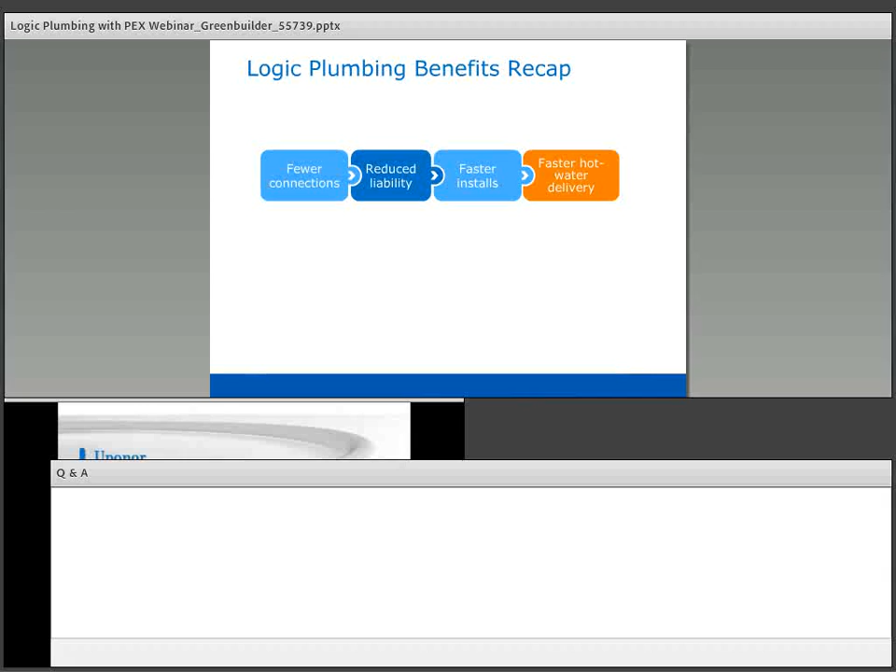All the things about the Logic plumbing benefits are what we talked about previously. Again, it's like overstating it over and over. I know it can get tiring to hear, but this is the mantra we need to live by: fewer connections, reduced liabilities, faster installs because of the fewer connections, and faster hot water delivery.

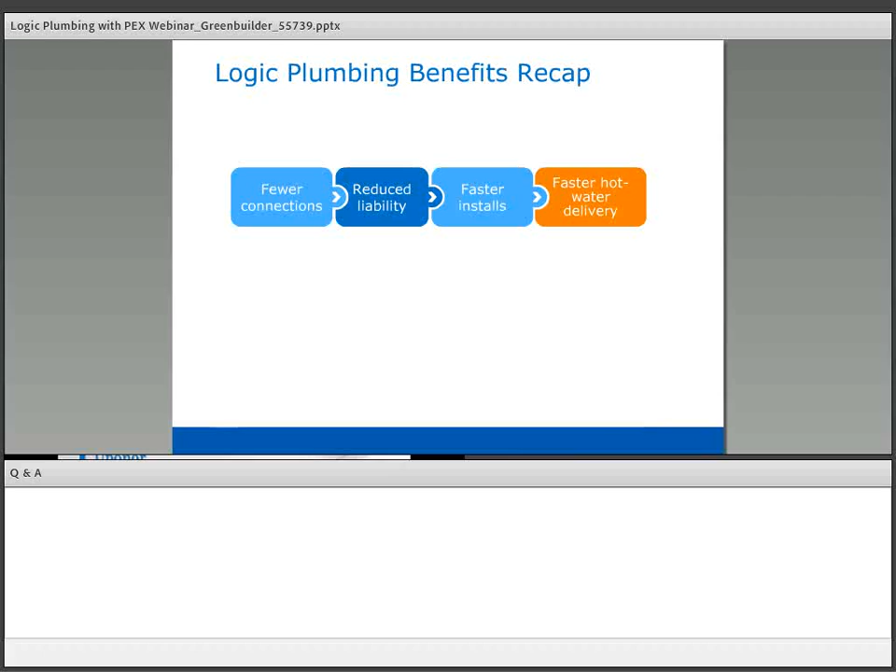So that is it. I hope that you've all taken something away from this. I welcome your questions. I'm anxious to answer them for you, so please.

Well, I know, Tim, I've got a couple of questions, if you don't mind. Often they'll talk about centralizing the mechanicals in a home to try and encourage those efficiencies. Is that still something that Uponor is encouraging with the Logic plumbing system?

Yes, very much so. I know there's a great push out there by many builders. They want to shrink the size of the plumbing systems without taking away any of the benefits that the plumbing systems deliver and the fixtures that they're putting in these homes.

So centralizing things as much as possible is a great alternative to that. It can't always happen, but Logic can be used very well in that environment, because remember we talked earlier, we want to keep those drops off the multi-ports as small and as short as possible, because that will again speed hot water delivery to the system. Okay, I figured so, but I just wanted to confirm that.

The other question I had was about the examples of freeze-damaged pipes you showed earlier, and also when you mentioned velocity noise. I believe some codes require pipe insulation now. A lot of the piping insulation codes are going to require you to put insulation on the pipe so you can maintain the hot water temperature and it doesn't drop, which reduces condensation situations. So there's lots of states adopting these codes for insulation on any piping material.